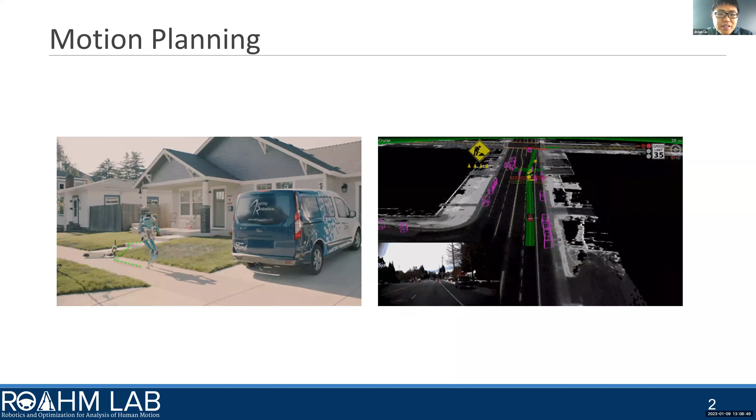To achieve these tasks, motion planning plays a really important role, whose job is basically to plan a viable path that guides the robot to a desired location. Such planned paths are better to satisfy robot dynamics. Otherwise, for example, a bipedal robot is very likely to fall if we command it to turn very quickly while it's walking with a large speed.

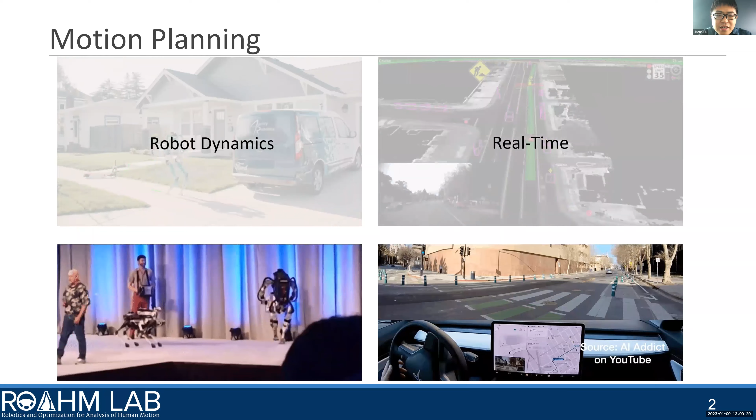Secondly, motion planning is expected to run in real time to deal with sensor measurements collected at runtime. Unfortunately, we can easily see robots crash unexpectedly in different scenarios due to imperfect sensing of the environment, so a motion planning algorithm should consider robot safety, and also we hope a motion planning algorithm can be general enough to survive in different kinds of environments.

So people have developed many fantastic algorithms for path planning, and taking all these four aspects into consideration while planning a path is still very challenging.

Because all robots have limited sensing horizon, real-time motion planning usually operates in a receding horizon fashion. Consider this toy example in which the ego vehicle in black is tasked to autonomously navigate itself to the right without hitting any obstacles shown in white. With receding horizon planning, the ego vehicle will first sense the world, find a path, and have it executed. The same procedure repeats with new sensor measurements.

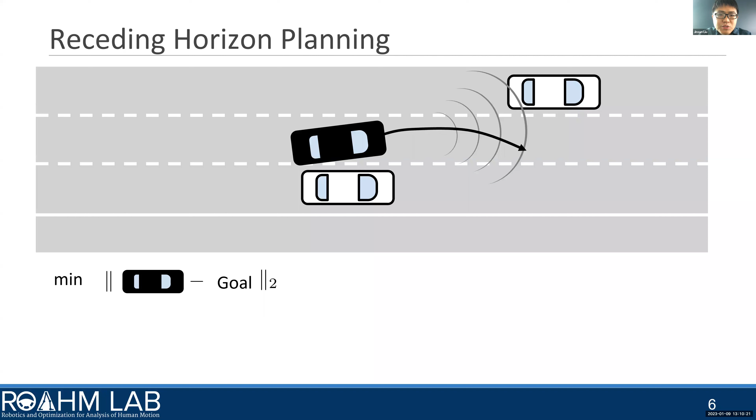Each planning iteration can be naturally written down as an optimization in which we try to minimize some cost, for example, here, the distance to our goal, and subject to robot dynamics as well as safety at all time.

Let's see where these four motion planning features appear in this setting. Environment is considered with sensor measurements collected at runtime. Robot dynamics and safety are enforced in constraints. And of course, for real-time performance, we just need to solve this optimization fast.

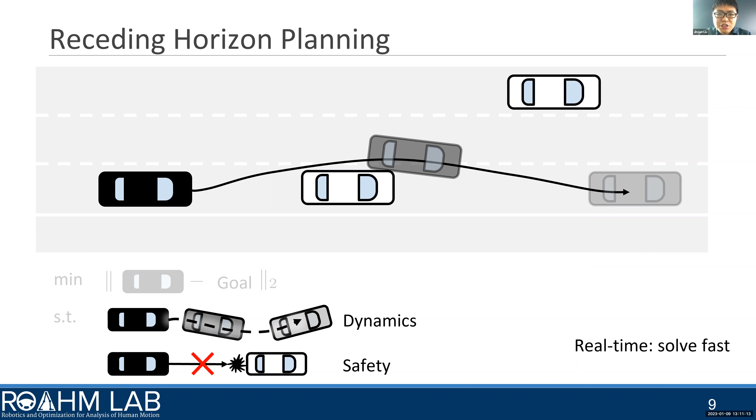Unfortunately, because robot dynamics are typically nonlinear, closed-form solutions of robot trajectories are usually not computable. Therefore, approximation can be utilized. In a naive implementation of receding horizon planning, because finer discretization of robot dynamics in time gives a better chance to provide robot safety, evaluation of these constraints can be potentially expensive, resulting in a trade-off between robot safety and real-time performance.

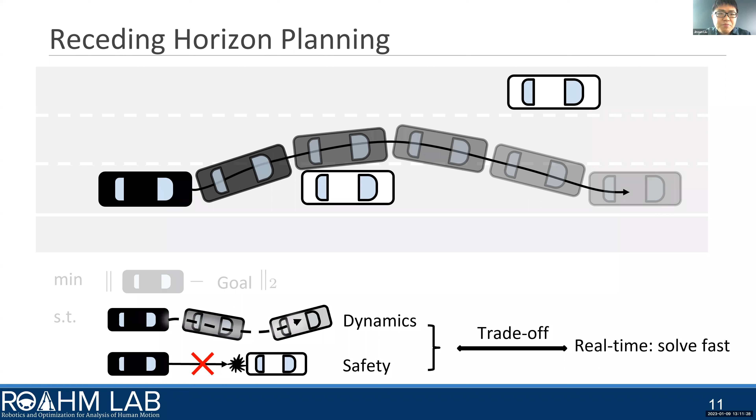To circumvent this unexpected trade-off, reachability-based trajectory design, or RTD, proposed by the alumni of ROAHM Lab, tackles this problem with 3 steps.

First, RTD will parameterize the control input of the system to avoid optimizing the whole control input sequence during online planning. Then RTD analyzes the reachability of the robot behavior completely offline using a forward reachable set, which collects all possible behavior of the robot starting from the considered initial condition space and control parameter space.

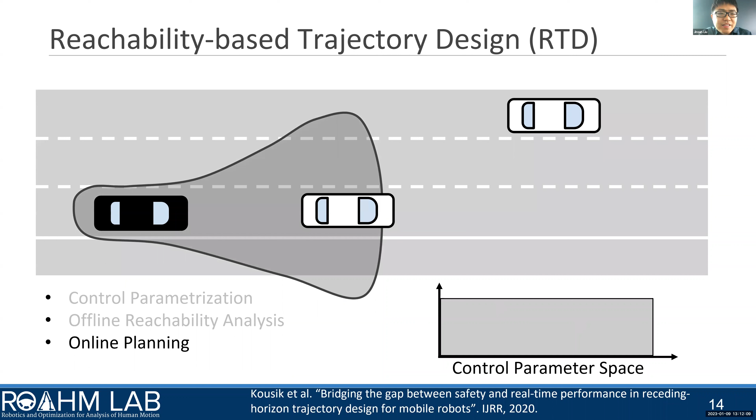Then during online planning, because robot behavior has already been computed offline, RTD directly uses the pre-computed reachable set to avoid obstacles while maintaining real-time performance, and the same procedure repeats.

In summary, RTD deals with robot dynamics by offline over-approximating the robot behavior using a forward reachable set. It provides robot safety in a continuous time interval. It runs in real time, and it treats the environment deterministically, which means it assumes perfect knowledge of obstacle locations.

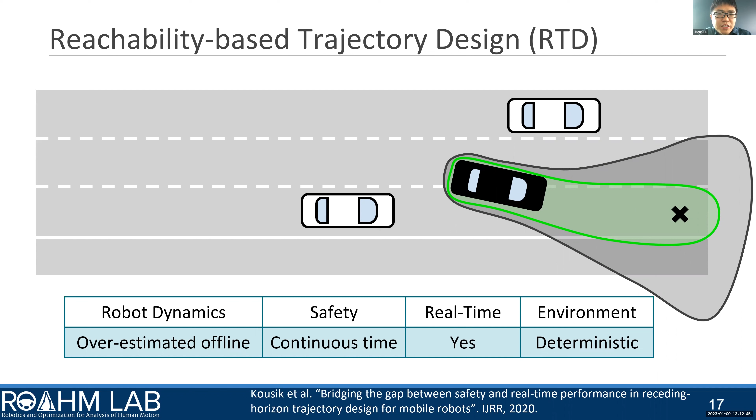RTD is a very general framework, and my colleagues have applied it on multiple platforms, including electrical vehicles, drones, and manipulators. Compared to these non-hybrid platforms whose dimensions are roughly 6, I have successfully generalized RTD to walking robots, including Cassie and Digit, which are more challenging in general because their dynamics are hybrid and their system dimensions are at least 20.

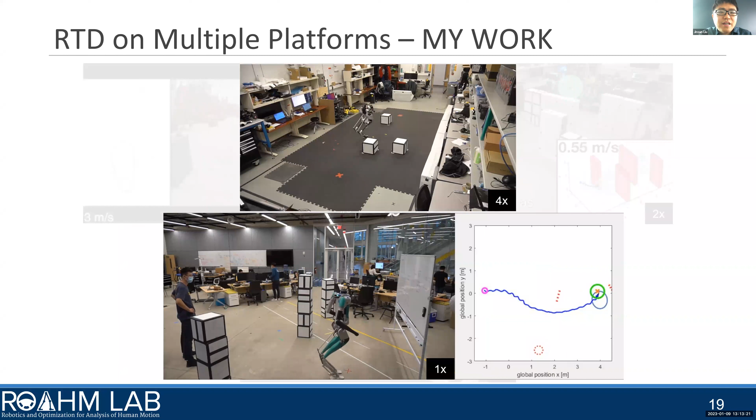However, as I worked with RTD, I could clearly feel that RTD suffers from several issues. Number one, RTD uses a simplified model to approximate the full order model, with the error between the two models being bounded. Therefore, the offline computed reachable set could be conservative. In addition, generating such error bounding functions requires aggressive sampling of the robot behavior, which is not quite elegant for a method that claims it provides a safety guarantee.

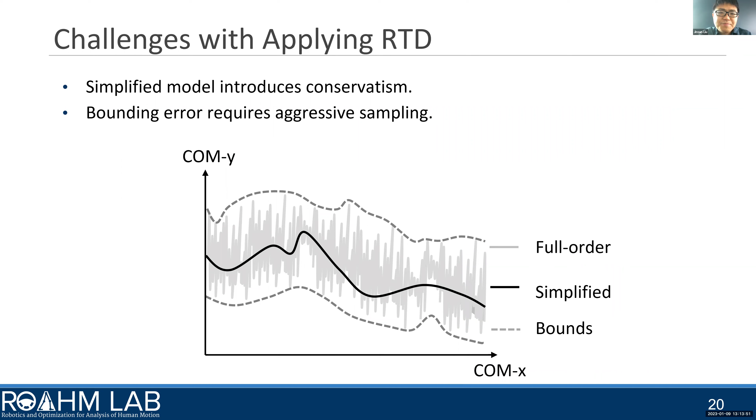Furthermore, this conservatism becomes even worse when the environment is uncertain, because in this scenario, RTD will require the robot to avoid a much larger unsafe area, which may result in online planning being infeasible and a large decline in the performance of the robot.

My thesis focused on illustrating the generality of RTD on walking robots and addressing the issue I just mentioned. In particular, we achieve tighter reachable set computation without using a simplified model, and we balance conservatism and safety in uncertain environments using differentiable chance constraints.

In this talk, I will focus on the last two items in autonomous driving scenarios, and the generalization of RTD on walking robots is described in my thesis document.

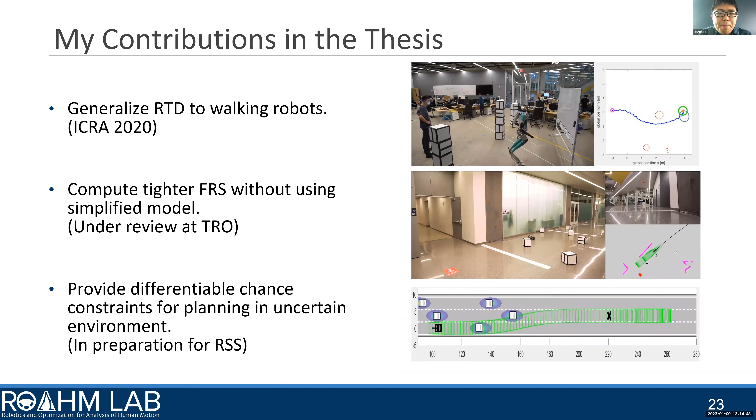Apart from the material I covered today, I've also worked on other projects, including SLAM, robust environmental mapping, and observer design for nonlinear systems.

In the first part of this presentation, we're going to assume the environment is deterministic, meaning obstacle locations are known conservatively at runtime. I'll now briefly go through some state-of-the-art motion planning approaches under this assumption.

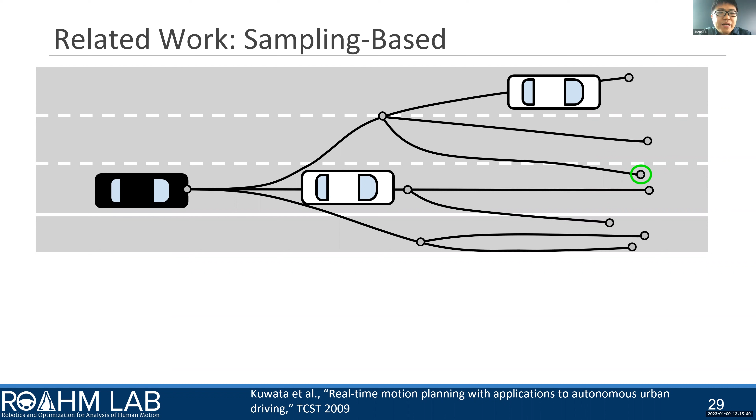To find a collision-free path, the sampling-based method approximates robot behavior by discretizing the state space and control space and numerically integrating the robot dynamics during online planning. Safety of the robot is checked at discrete time instances. Therefore, real-time performance of this method really depends on the fineness of discretization in both time and state space.

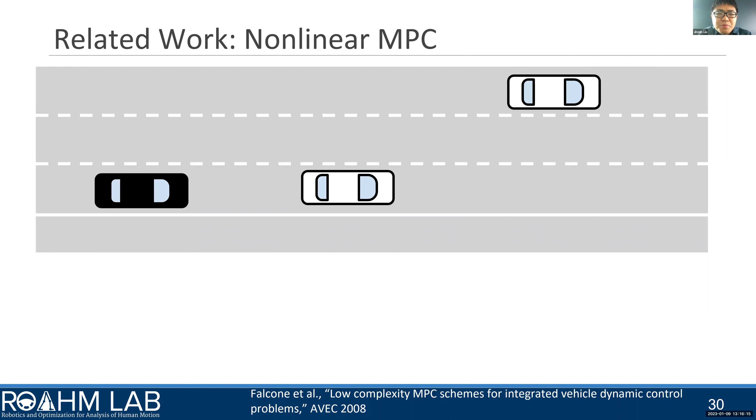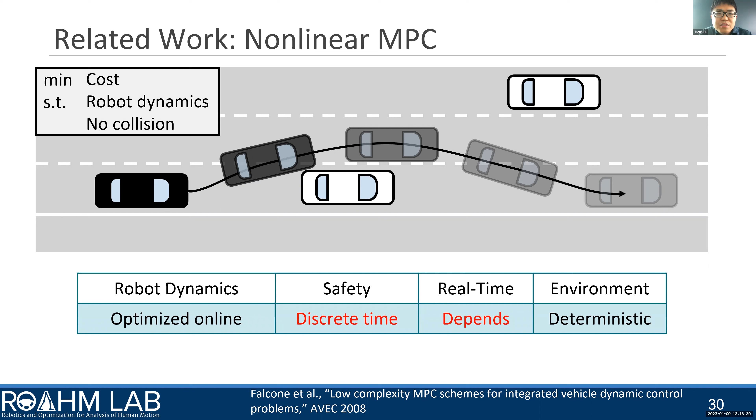The nonlinear model predictive control method plans a collision-free trajectory by solving a nonlinear optimization with discretized robot dynamics and safety conditions enforced at discrete time instances. Because discretization is also in use, nonlinear MPC methods also suffer from the same trade-off between time discretization and real-time performance.

To address this challenge, reachability-based approaches pre-compute a forward reachable set in the form of, for example, zonotopes, which is a special form of polytope that I'll formally define in a minute.

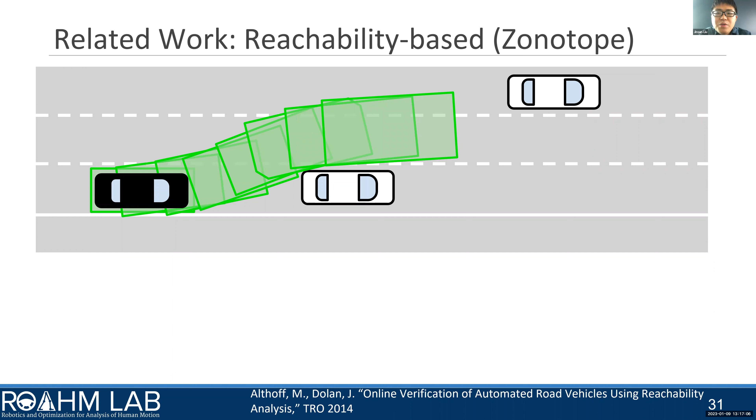To offline compute a tight reachable set over a continuous time interval, such methods linearize the robot dynamics into a linear time-variant system, with the linearization error being conservatively bounded. This method checks robot safety during continuous time intervals.

However, because the control space is discrete, zonotope reachability-based methods require a zonotope library for each maneuver, and therefore result in very large memory consumption.

The approach I describe here is called Refine, which is an extension of the traditional RTD framework using robust feedback linearization and zonotopes. In particular, we realized that to generate a tighter reachable set, it is important to take controller design into consideration as well.

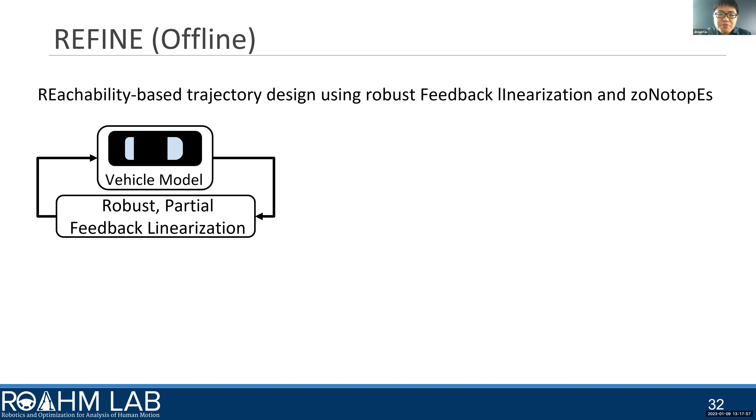Therefore, in this work, we first design a robust partial feedback linearization controller to track parameterized reference trajectories. With the closed-loop full order dynamics, we next offline compute the forward reachable set of the robot using zonotopes.

Then during online planning, depending on the value of the control parameter we choose, the pre-computed zonotope reachable set can be narrowed down to much tighter zonotopes for real-time obstacle avoidance.

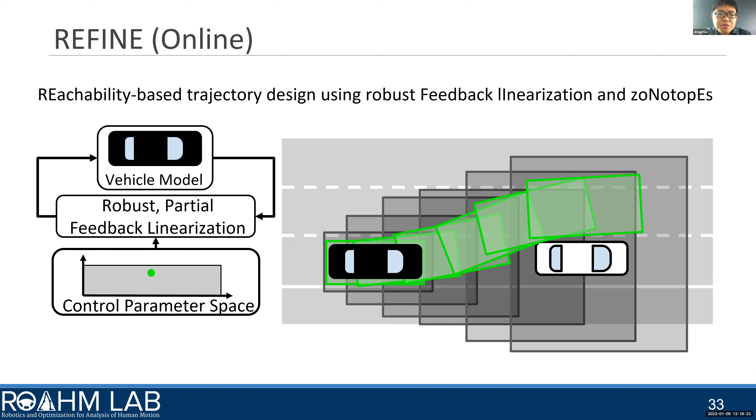Here is a quick review of what I've described. Compared to the method I just mentioned, Refine approximates the FRS offline with continuous control space and provides safety checks during continuous time intervals.

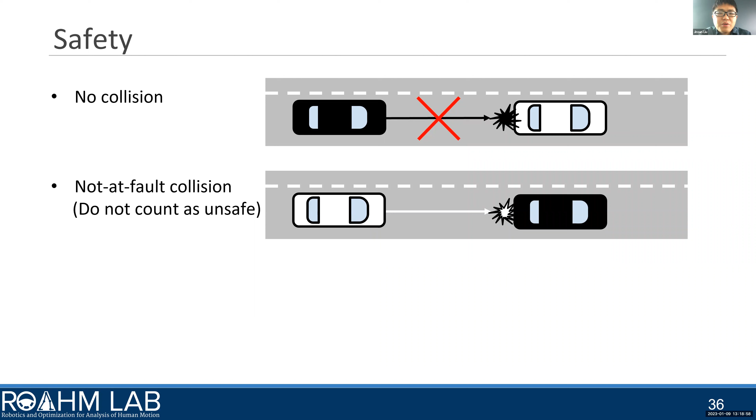In this work, we consider safety in three folds. First, we do not run into other vehicles intentionally. However, in the case when we are stopped and some other vehicle runs into us, we do not consider that as our fault. And finally, we ensure the existence of a fail-safe maneuver so that when online planning becomes infeasible, we can always apply this fail-safe maneuver to stop and protect ourselves.

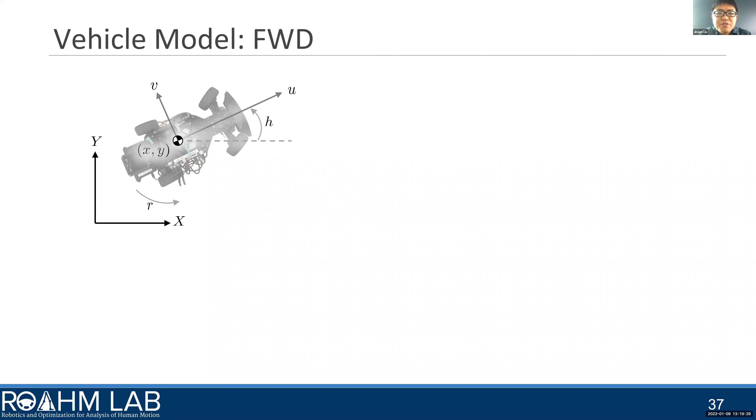In this work, we consider a front-wheel drive vehicle model with 6 states, where X, Y, H give the position and heading of the vehicle, and U, V, R give the longitudinal speed, lateral speed, and yaw rate. The dynamics are shown on the right, where items colored in yellow are vehicle parameters, including mass, moment of inertia, and vehicle length. Notice the steering angle and wheel speed are the actual control inputs to the vehicle.

But in this presentation, I'm going to treat tire forces as our control inputs and observed signals for simplicity. The transformations between tire forces, steering angle, and wheel speed are detailed in my thesis document.

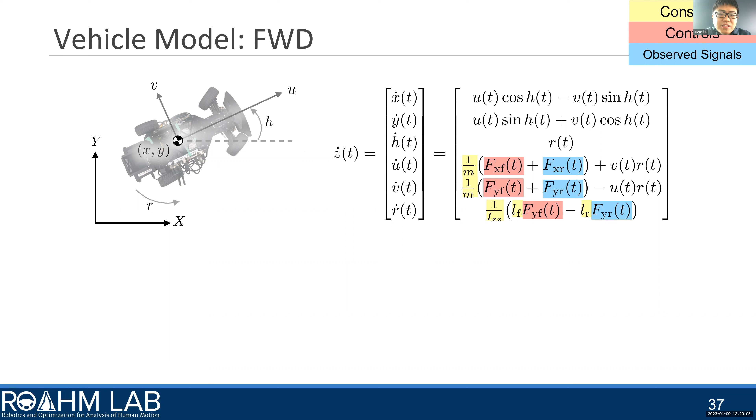I'd like to point out that tire forces are indeed nonlinear functions of vehicle states that are constructed in a data-driven fashion in general. This control and planning framework I present today can account for modeling errors that are unknown and arise from, for example, imperfect system identification or state estimation.

We can also generalize to rear-wheel drive and all-wheel drive vehicle models. However, due to time limit, I'm going to assume we have a perfect vehicle model today.

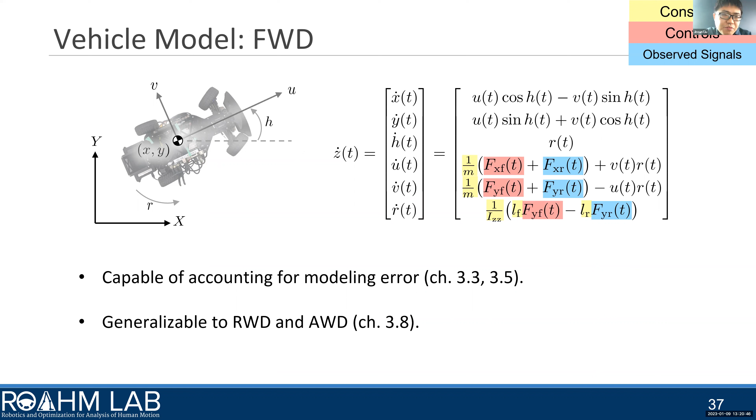Similar to RTD, we also parameterize our controller using a 2D vector P that indicates desired speed and lateral displacement. In particular, we define our control parameter among 3 families of daily applied maneuvers, including speed change, direction change, and lane change.

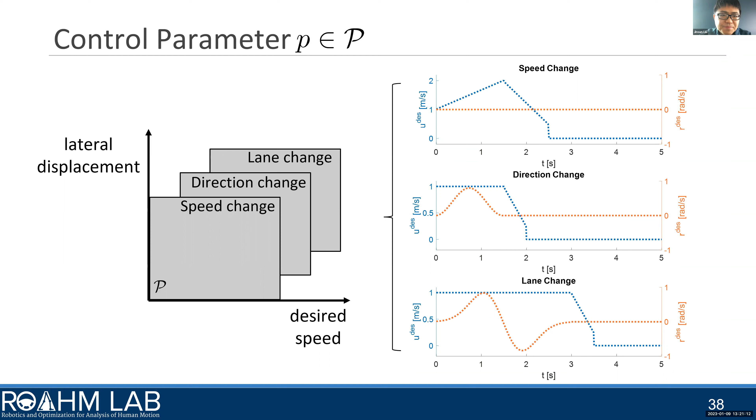Now, compared to the original dynamics, nonlinearities in the dynamics of U and R disappear in the case when there's no modeling error. And in fact, when there is modeling error, we are able to introduce a robust term in the controller so that the modeling error can be penalized at its worst case. And we have the theorem saying, given vehicle initial condition and control parameter, the vehicle is guaranteed to be stoppable within a bounded period of time, and we can prove the tracking error on U is bounded. And the theorem also holds when we have non-zero modeling error.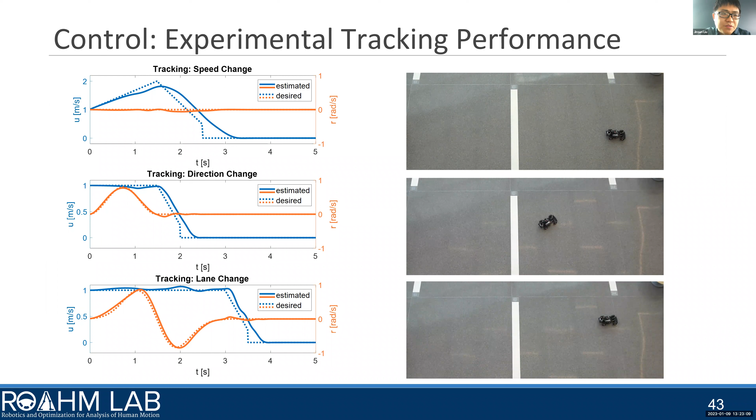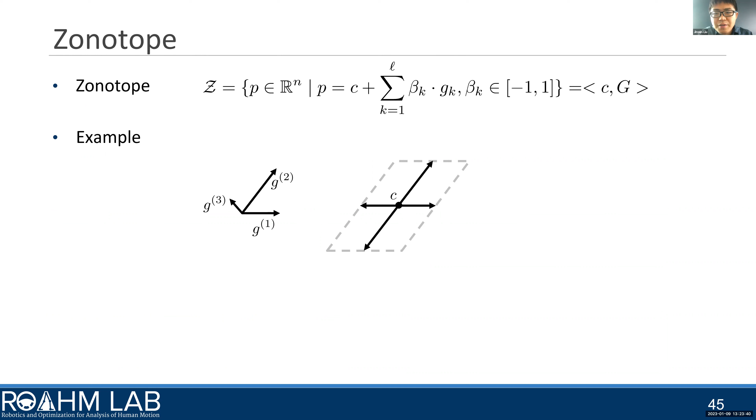Next, I'm going to define zonotope and offline reachability analysis. A zonotope is a special polytope defined by the center C and generator G. For example, here in this 2D space, we're given 3 generators and a center C. Then the first generator makes our center into a line segment, and the second generator makes the line segment into a parallelogram, and the third generator makes the polygon into a hexagon.

Zonotope is nice because summation and matrix multiplication are computationally tractable. Therefore, zonotope behaves well in linear systems reachable set computation. Recall our closed loop dynamics of U and R are linear when there's no modeling error. So that's the reason why we choose zonotope as the mathematical tool that we use for reachability analysis.

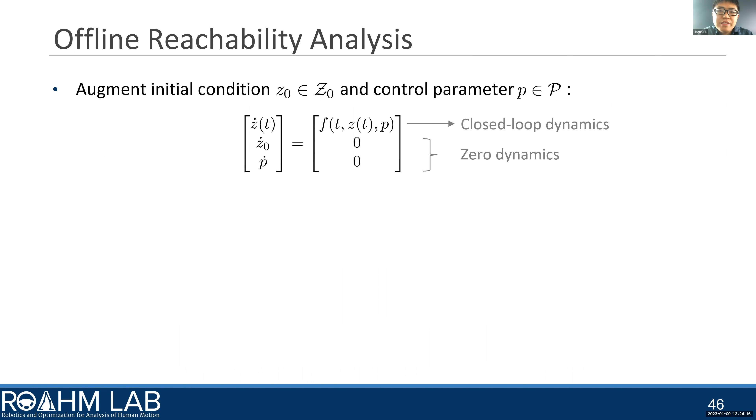During offline reachability analysis, we first augment initial condition and control parameter in vehicle states and give them zero dynamics. We do this because this allows us to hold the information of initial condition and control parameter all the time during the computation of reachable sets. And then after we evenly partition the planning horizon into pieces, we can compute the reachable set from initial condition space, which is Z0 times Z0 times P.

Such zonotope reachable set can be solved using an open source toolbox called CORA, where R sub j indicates the zonotope reachable sets during the j's time interval. Notice this zonotope reachable set over-approximates the vehicle behavior with all elements in the control parameter space P.

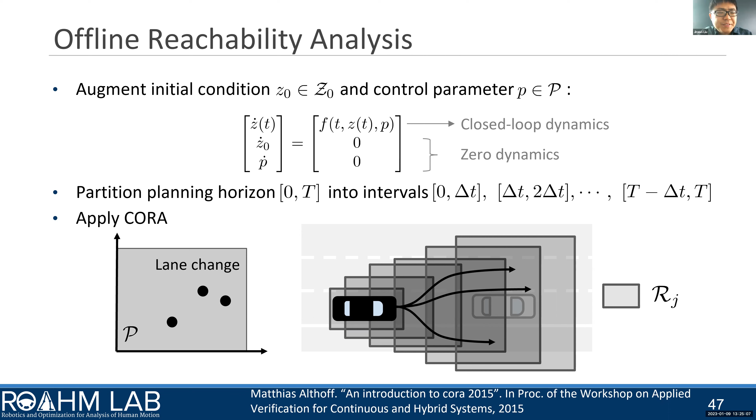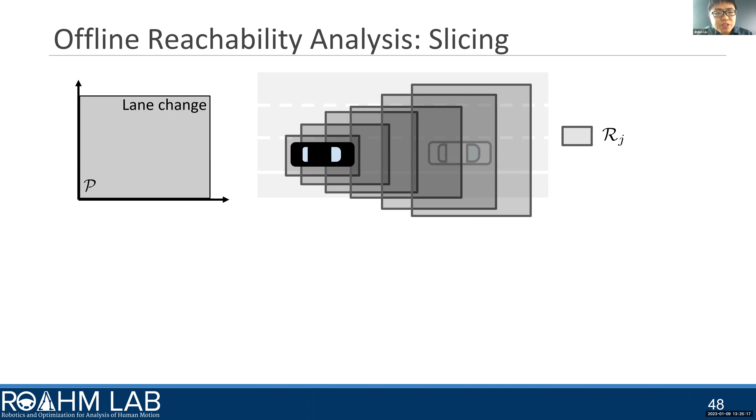This zonotope reachable set shares a very nice property. Remember, we have encoded the information of initial condition and control parameter in our state. Therefore, we can generate a slice of the zonotope reachable set based on our initial condition and control parameter. And we have the theorem saying the sliced zonotope over-approximates the robot behavior during the j's time interval.

Notice the slice operator is linear with respect to Z0 and P. And I would like to emphasize that during the whole procedure of offline reachability analysis, no simplified model is involved. Therefore, we have avoided a major downside of RTD.

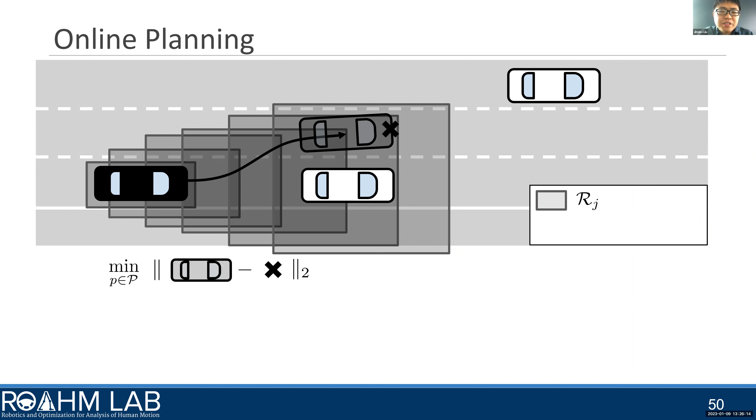Then I'll formulate our online planning. During online planning, given the tracking waypoint, we plan a path by solving an optimization problem in which we minimize the Euclidean distance between the waypoint and the predicted vehicle position. Sliced zonotopes are used to ensure collision-free against other obstacles. And we have the theorem saying any feasible solution of the optimization guarantees vehicle safety.

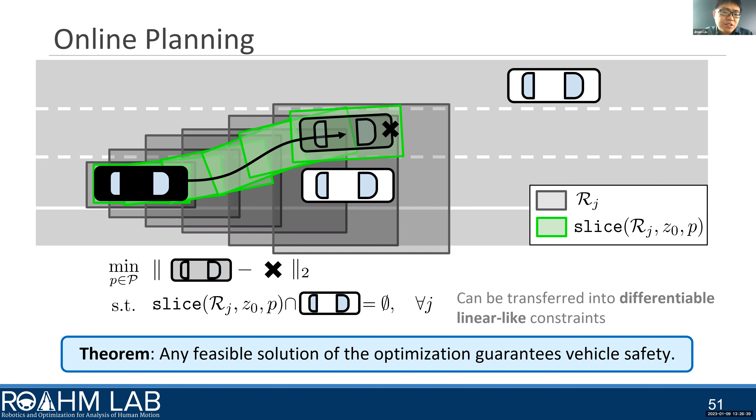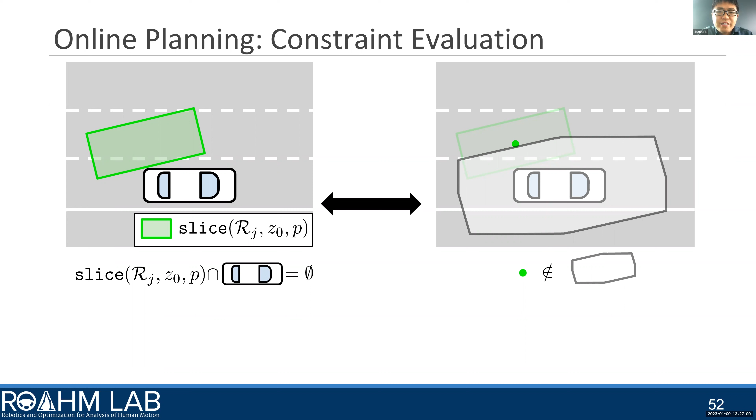Note, this constraint appears as set intersection, but in fact, we can transfer this constraint into differentiable linear-like constraints that we can implement easily. In particular, we first transfer the collision-free condition into a point-exclusive condition, which says the center of the sliced zonotope should not appear inside the vehicle's footprint buffered by the size of the sliced zonotope. This condition is equivalent to this exclusive relation.

Notice the left-hand side of this relation is a linear function of P, and this is because the sliced operator makes the center of the sliced zonotope, the green dot, really linearly dependent on P. The right-hand side of this relation is the half-space representation of the polytope. This condition can be further simplified into the following inequality, which is the actual constraint that we implement for online planning.

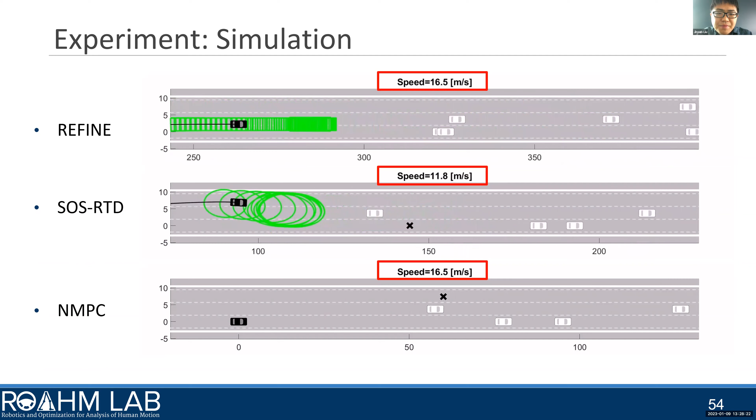This implies the polynomial reachable set is actually more conservative than our zonotope reachable set. Also, RTD stops in the end because its online planning becomes infeasible. Let's have REFINE keep running aside and see how NMPC works.

It can be seen that without reachability analysis, NMPC is able to drive the ego vehicle more aggressively with much higher speed. However, because NMPC imposes vehicle safety at discrete time instances, the ego vehicle ends up with a crash, even though NMPC thinks no safety conditions are violated.

We have generated more than 1,000 scenarios, and REFINE is able to navigate through the traffic successfully 83% of the time, with no crashes. RTD also has zero crashes, and its solving time is much faster, but with a lower success rate due to the conservatism of the polynomial reachable set.

Also, it needs more memory to save those polynomial reachable sets compared to REFINE. The NMPC method crashes 29% of all trials, but results in the fastest traveling speed.

However, NMPC is unable to provide any real-time performance because the planning horizon is much smaller than the solving time. We have also compared REFINE against a baseline method proposed by the group that implemented CORA.

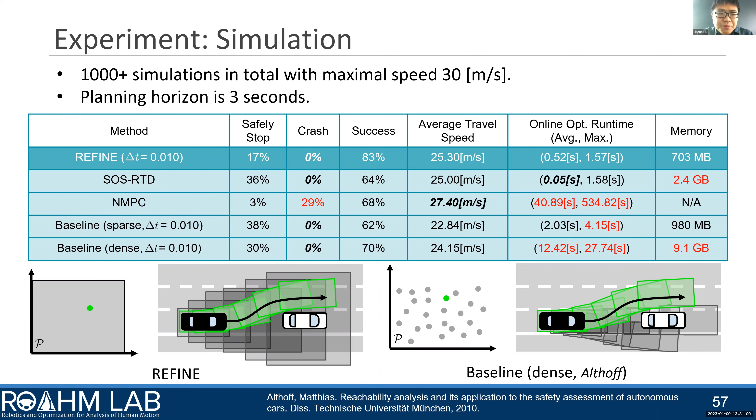On hardware, we implement the proposed method on a 1/10 scale race car robot called Rover. During this test, we asked the Rover to run three loops on the first floor of the robotics building.

While the Rover is running, we throw boxes in front of it just to see how robust REFINE is. We have attached a GoPro on the Rover so we can observe the experience from the first-person point of view.

On the bottom right, we provide a visualization of how REFINE plans, in which the Rover is shown in black, reachable sets are shown in green, static obstacles of the building like chairs and walls are colored magenta, and the boxes we throw are shown in white.

During this experiment, we did not throw any obstacles during the first loop, to see if the Rover can at least finish the loop with the provided maneuvers, including speed change, lane change, and direction change maneuvers.

Starting from the second loop, we began to throw boxes in front of the Rover to see if it can sense obstacles and plan a path to avoid them in real time.

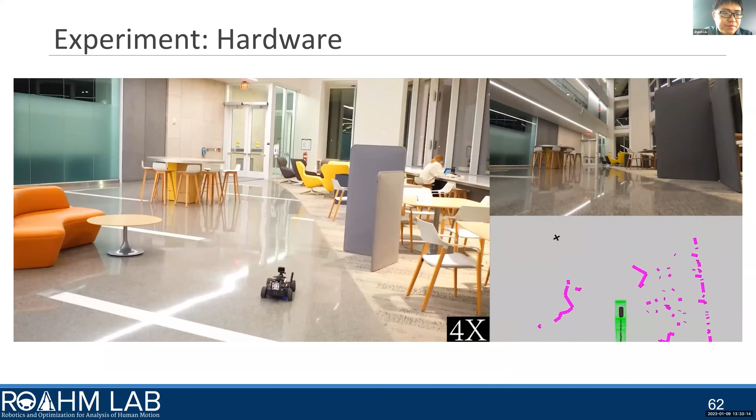And in the third loop, we keep throwing boxes in front of the vehicle or in front of the robot. And the experiments show that Refine is robust enough to handle the task.

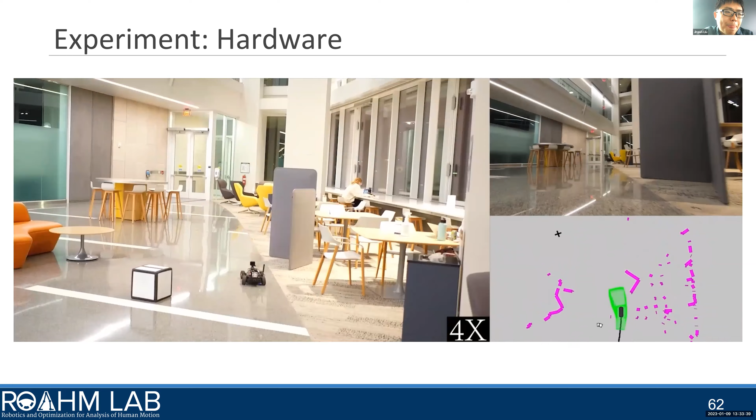Oh, something is wrong. Oh.

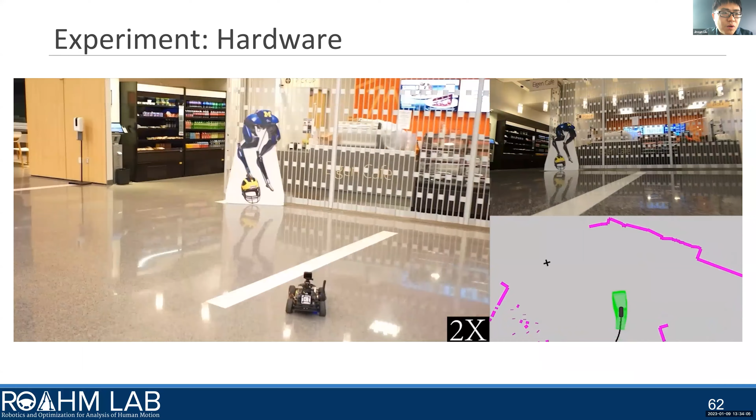And then finally, we stop the experiments by building a wall at the end of the third loop, to see if the rover can just stop itself when there's no path, no safe paths.

And during the whole experiment, no collision happens. Next, I'm going to talk about real-time chance constraint motion planning in uncertain environments.

I'm going to first talk about why this chance constraint can be helpful, and then I'll go through related work, explain chance constraint safety and online planning, and then I'll give a detailed mathematical explanation of how we evaluate chance constraint, and then I'll provide some experiments.

So in the uncertain world, we no longer assume perfect estimation and prediction on locations of obstacles due to, for example, sensor noise and the lack of information on vehicle motions. Therefore, collision can be described in a probabilistic fashion.

In this work, the risk of collision is defined as the probability that the ego vehicle intersects with the moving vehicle. Then during the trajectory planning online, we can search for a plan that doesn't exceed the maximum risk of collision that we want to take by enforcing a chance constraint.

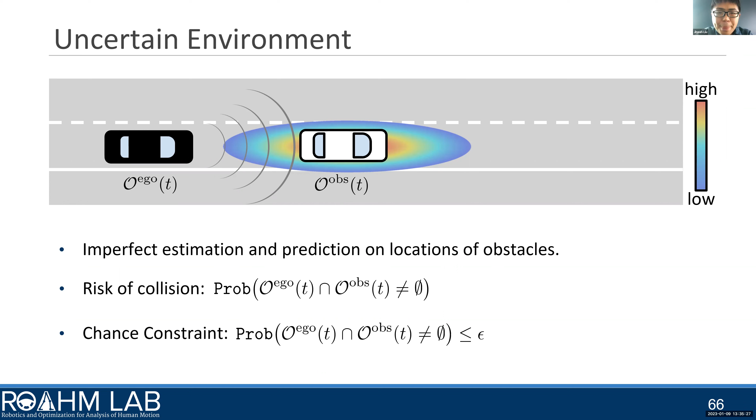Now the question is why chance constraint is helpful. Recall a deterministic approach may require the ego vehicle to avoid a much larger unsafe area, which could result in online planning becoming infeasible easily and a large decline in performance.

With the chance constraints, because we are willing to take some risk, we may find a feasible solution easier without violating the risk we want to take.

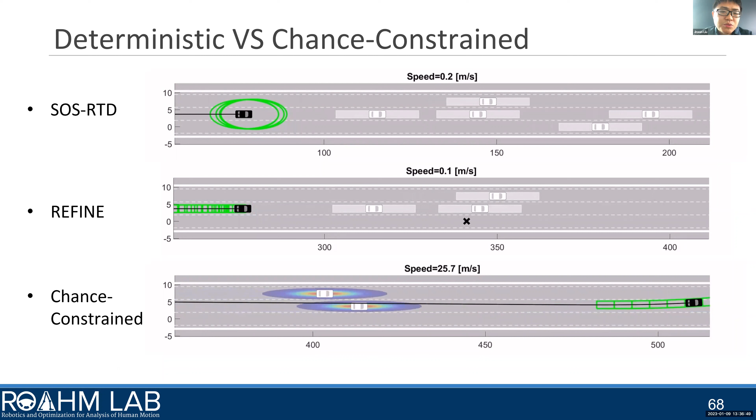So now we know chance constraint could be helpful for motion planning in uncertain environments, but the annoying thing is computing this risk of collision in closed form is actually very difficult.

And this is because in real applications, probabilistic estimation of obstacles can be arbitrary. So now I'm going to go over some methods to approximate the probability of risk in the literature.

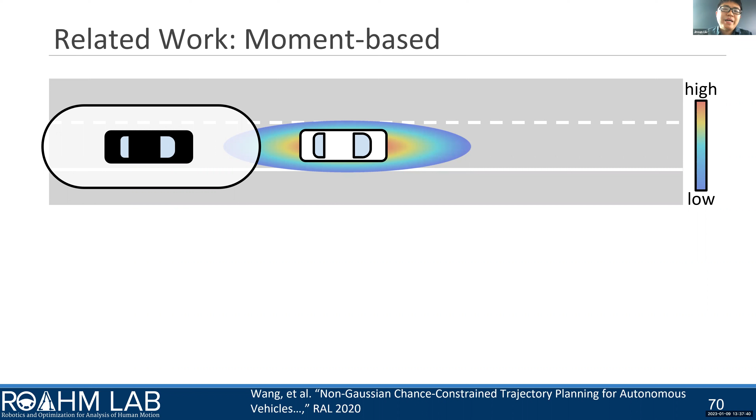To strictly over-approximate the risk of collision so that the chance constraint can be sufficiently enforced, one can create a so-called collision ellipsoid, generated by buffering the ego vehicle's footprint by the obstacle's footprint, shown as this white region. Then the collision risk can be computed as the probability of the obstacle center intersecting with the collision ellipsoid.

Such probability is then overestimated using a moment-based inequality, for example Cantelli's inequality, that only uses the mean and covariance of the probability distribution.

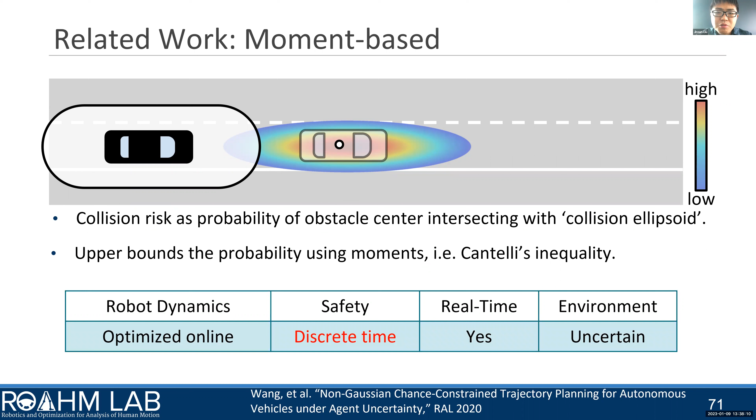Moment-based methods optimize robot trajectory online and can provide safety at discrete time instances. However, this relaxation of the risk using moment-based inequality can in general be conservative, because this inequality has to hold for all possible probability distributions that share the same probability moments.

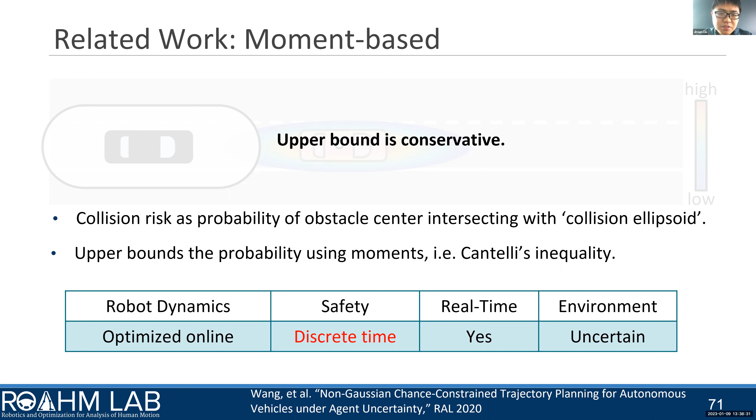My colleague Sean Vaskov has proposed a risk-aware motion planning framework called CCPBA with the help of polynomial reachable sets. In CCPBA, risk of collision is bounded from above and below in real time using branch and bound, with the assumption that we have perfect knowledge of the cumulative density function in closed form.

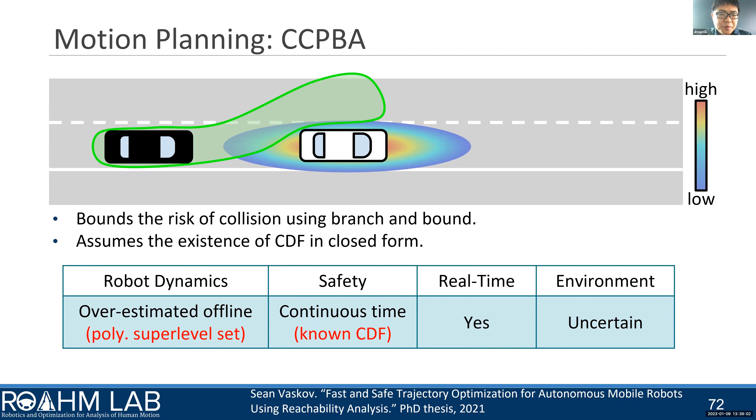CCPBA provides robot safety in continuous time. However, the problems of CCPBA are, first, CCPBA suffers from conservatism in using polynomial reachable sets, and the assumption of a closed-form cumulative density function may be violated in real applications.

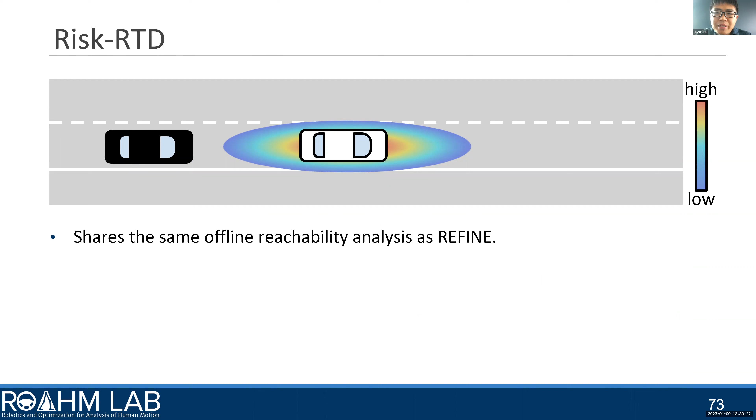The framework I present here is called Risk-RTD, which shares the same offline reachability analysis as REFINE and plans online by solving an optimization with a chance constraint that is sufficiently enforced in a tighter and computationally effective way.

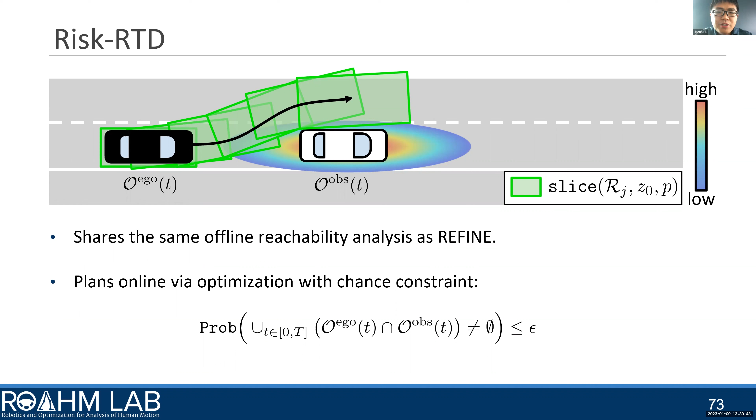In particular, we're going to use this chance constraint, which says the probability of a collision during the entire planning horizon is bounded by some threshold epsilon.

Here is a quick review of what I described. Compared to these two methods, Risk-RTD utilizes zonotope reachable sets and provides robust safety in continuous time intervals without assuming perfect knowledge of the cumulative density function.

Under the setting of an uncertain environment, we need to modify our definition of vehicle safety. Compared to the vehicle safety we used previously, in this work we define chance constraint vehicle safety by bounding the probability of collision from above with some value epsilon as the risk threshold.

Because of limited time, I'm going to skip the part on how we decide the risk threshold. However, a discussion on how we choose the value of epsilon based on real driving data published by the National Highway Traffic Safety Administration can be found in my thesis document.

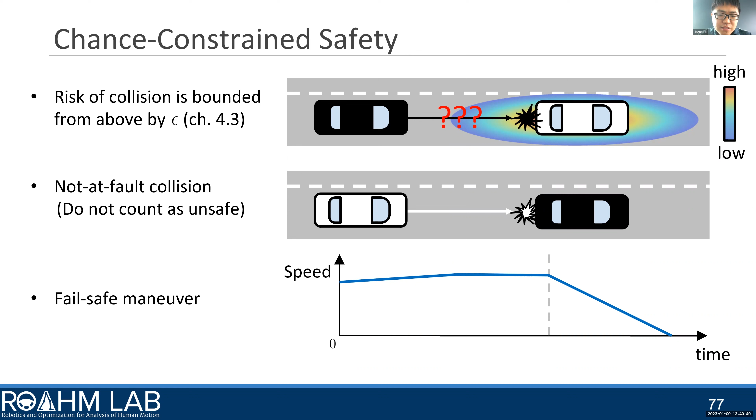Online planning can be formulated by enforcing the probability of a collision during the entire planning horizon being bounded by epsilon. For notational simplicity, I'm going to denote T sub j as the j'th time interval that we generated by partitioning the planning horizon.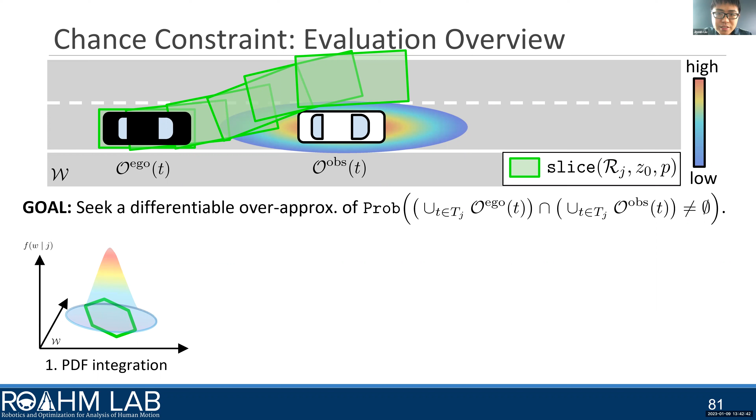To do this, I will first relax the collision risk as an integration of probability density, then relax the domain and integrand of this integration, and finally compute the relaxation of the integration in closed form.

To start, can I ask a quick question? Yes. Just to break the silence.

Can you give us a high-level intuition on why you need differentiability? What is the benefit of differentiability here?

The answer is that later during online planning, we're going to solve this online optimization with the chance constraint being enforced. To speed up the solving procedure of this optimization, providing a gradient, or providing the differential information of the chance constraint, can be helpful.

Will you explain how you utilize this differentiability later on? Because it will provide the gradient of the chance constraint, and then the optimization solver will just use the gradient to speed up the solving procedure so that we can achieve real-time performance. Okay.

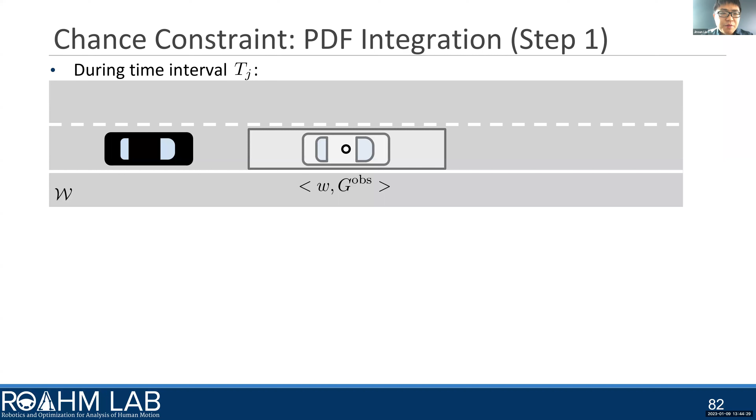To start, because our zonotope reachable sets outer-approximate the vehicle behavior over all time intervals, we assume we are able to estimate the location of obstacles over time intervals. In particular, we assume the region that the other vehicle can appear during the j'th time interval can be enclosed as a zonotope with center W and generator G obs, where W follows a probability distribution with density F of W given J.

Here we assume F is a twice differentiable function, and notice this is the only assumption I'm going to make on the probability observation of the obstacle. So this work doesn't really depend on any specific type of probability distribution.

We can then prove a theorem saying the probability of collision during the j'th time interval can be bounded by the integration of this PDF over our reachable set and this swept volume.

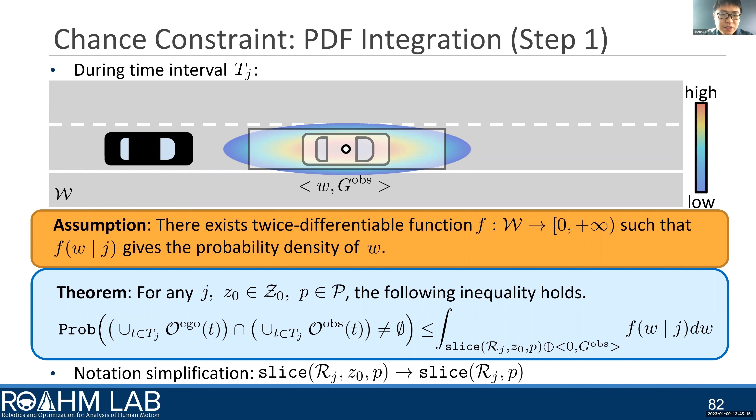For notational simplicity, from now on I'll suppress the dependency of the slice operation on the initial condition Z0. Recall that the slice operator is a linear operator. Therefore, one can represent the integration domain as a linear function of P, with this small zonotope R sub J bar and some matrix M.

Then we can rewrite the PDF integration as the equality shown here.

Next, we are going to relax the domain of integration. We are going to cover R sub J bar by a collection of right triangles that each have non-trivial intersection with the zonotope, and we have the original integration of the PDF being bounded by the summation of the integrations over all triangles. So now we only need to consider the integration over each triangle.

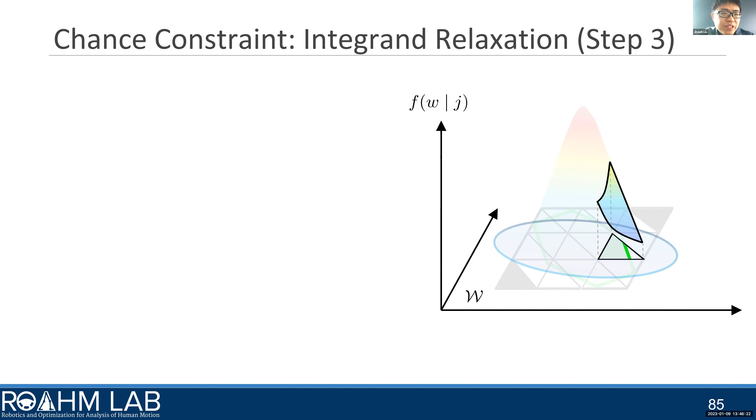In the third step, I'm going to relax our integrand. Because we have assumed F is twice differentiable, we start by rewriting F as its second order Taylor expansion and apply the mean value theorem to get rid of higher order terms.

Here, W0 is the vertex of the right angle in our triangle, and W star is some point on the line defined by W0 and W such that equality holds. Notice the mean value theorem only tells us the existence of W star, but not its exact position.

Therefore, to remove this uncertainty, we instead evaluate the Hessian over the entire triangle rather than a single point, using interval arithmetic.

Recall that our goal is to maintain differentiability, but interval arithmetic makes this intractable, simply because the evaluation domain of interval arithmetic actually depends on our control parameter P.

Therefore, to maintain differentiability, we have to further relax the Hessian by evaluating it over the entire region that a small triangle can sweep according to the domain of the control parameter. This results in an approximation that is invariant with respect to P.

With this inclusion, interval arithmetic provides a supremum and an infimum of the original density function at each point in this triangle.

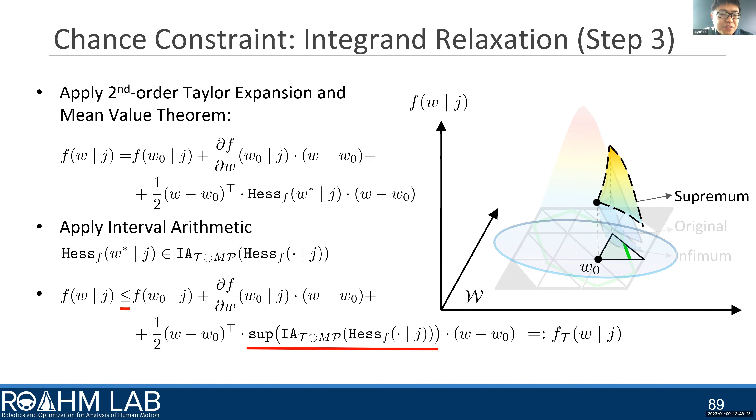Now with the relaxed integrand, notice the domain of integration, t plus mp, is just a right triangle, which is the simplest polytope made with line segments in the 2D world.

Our relaxed integrand is indeed a quadratic polynomial of W. Therefore, we can apply this lemma, which says there exists a differentiable function capital F sub t in closed form such that this integration can be evaluated exactly using the function capital F sub t.

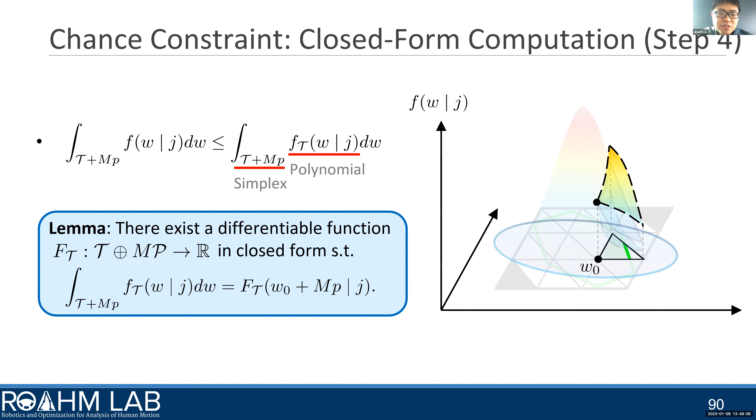So as a quick summary, we first relaxed the original risk probability as a PDF integration. We relaxed the domain and integrand conservatively. And finally, we are able to compute the relaxation in closed form.

Notice this f sub t is a differentiable function. Thus, this resulting relaxation is indeed differentiable with respect to p.

So with our relaxation, we are able to enhance the original chance constraint optimization with what we just derived. Notice this new chance constraint is differentiable, so this optimization can be solved faster.

And the evaluation of this chance constraint is naturally parallelizable, so we are able to efficiently evaluate it using CUDA.

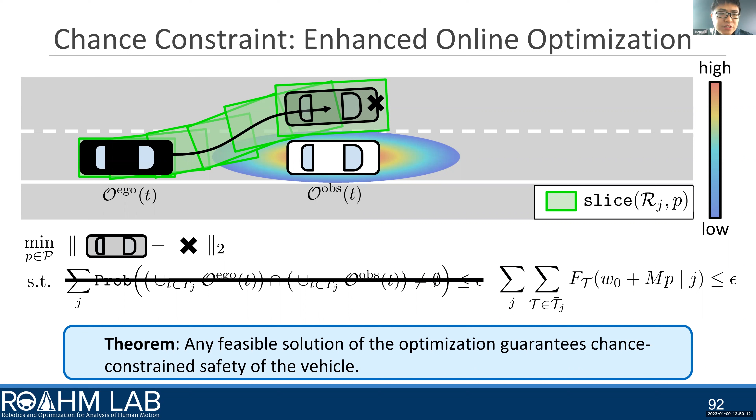And we have a theorem stating that any feasible solution of the optimization guarantees chance-constrained safety of the vehicle.

Experiments. In the first experiment, we want to test how tight our risk relaxation is compared to Monte Carlo integration, which we treat as the ground truth.

We also compared against the Cantelli inequality and the Bernstein-bound method, CCPBA. In this experiment, we generate a random Gaussian distribution and integrate it over a randomly chosen zonotope reachable set that we generated in Refine.

Over more than 3,000 scenarios, we see the proposed integration relaxation provides a much tighter over-approximation of the collision risk. And with the parallel implementation, we are able to evaluate the integration faster than CCPBA.

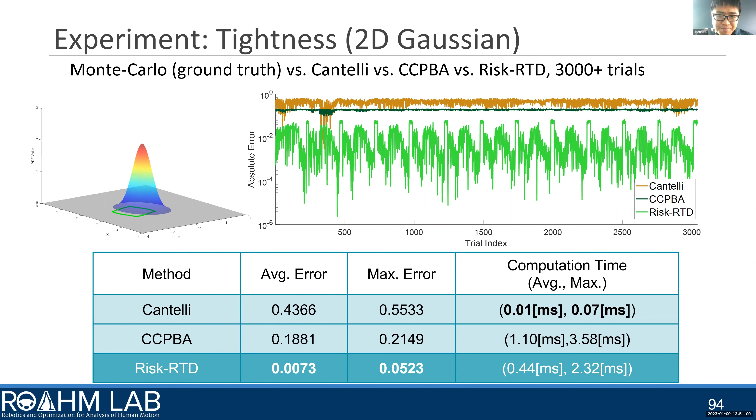To see how general our approximation is, we also test the proposed over-approximation over multiple exponential families, including 2D Gaussian, 2D beta, and 2D multimodal distributions.

Our approximations are consistently close to the result generated using Monte Carlo integration as our ground truth, across all three kinds of probability distributions.

Next, we compare our method against Cantelli and CCPBA. By Cantelli, I mean planning a trajectory in an MPC framework by solving a nonlinear optimization with the Cantelli inequality enforced. In this simulation, we ask the ego vehicle to achieve a lane change maneuver through dense traffic, but Cantelli is unable to achieve it.

In fact, Cantelli can't even find a feasible solution, so the ego vehicle just ends up maintaining its speed and runs into the vehicle ahead.

Meanwhile, CCPBA and our Risk-RTD method are both able to make the lane change safely.

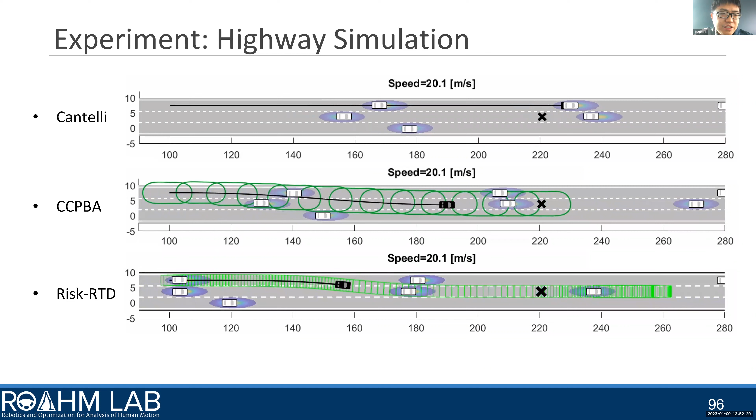Among all tests we made, Cantelli is only able to achieve the lane change about 9% of the time, but has a crash rate of 35%, due to the fact that it doesn't really have a braking maneuver when the planning is infeasible. Cantelli also achieves the highest travel speed because it doesn't use a forward reachable set to enforce the chance constraint. CCPBA solves the online optimization faster and is able to achieve the lane change at a higher rate.

Compared to these two methods, we are able to achieve the highest success rate, and we are also able to achieve real-time performance because our runtime is smaller than the planning horizon.

We also compare the three methods in randomly generated scenarios, in which they need to plan multiple iterations successively and let the ego vehicle travel for a longer distance. Among these tests, both Cantelli and CCPBA have low success rates, but we are able to survive about 70% of the trials.

Next, I'm going to vary the risk threshold and see if that makes any difference. By varying the value of epsilon, we see when epsilon equals 0.005, the ego vehicle decides to just stick in its lane because it feels like doing a lane change may be very dangerous. With epsilon equals 0.05, the ego vehicle is able to achieve half of the lane change. And with epsilon equals 0.1, the ego vehicle is able to achieve a full lane change.

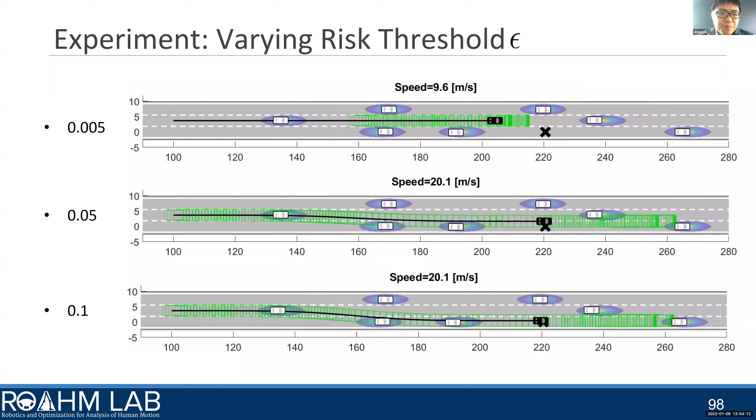Statistically, we do see as epsilon increases, Risk RTD gets easier to find a lane change maneuver. But one thing is that even when we have increased our threshold to 0.1, or equivalently 10%, our crash rate is still considerably low. That means although we have outperformed the other two methods, we are still being very conservative compared to the actual risk of collision. In fact, we are able to analyze the conservatism in our computation from several perspectives.

However, due to time limits, I'm going to skip this, and I'm happy to discuss it if people are interested.

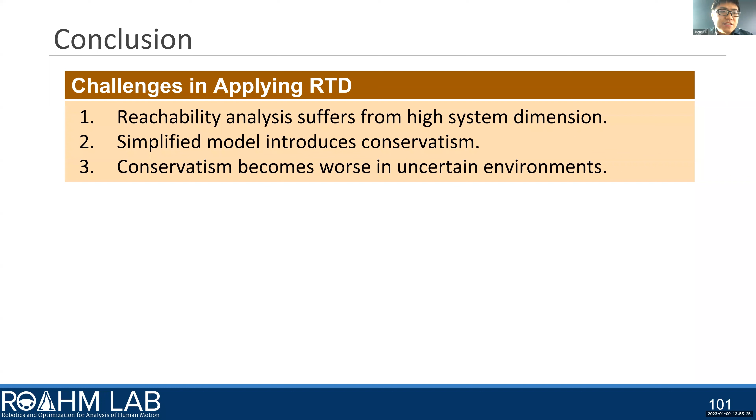As a conclusion, my thesis tackles three challenges in applying the RTD framework. First, reachability analysis suffers from high system dimension, and the usage of a simplified model introduces conservatism, and this conservatism becomes worse in uncertain environments. My contributions are: first, I'm able to generalize RTD to high-dimensional walking robots; second, I'm able to compute a tighter forward reachable set without using the simplified model; and we provide a differentiable chance constraint for planning in uncertain environments.

Here I'd like to provide some possible future directions based on my work. First, it would be good if we can achieve reachability analysis on the full order model of a walking robot. My lab mates Bohao and Iti have made some work using a robust controller in simulation, but more work needs to be done to achieve real-time planning.

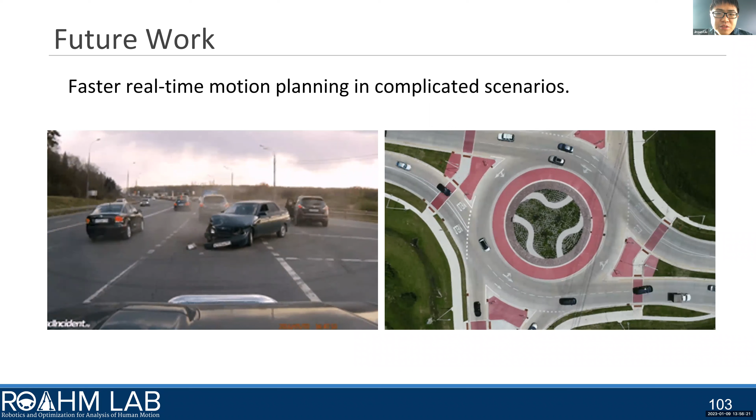Next, in more complicated scenarios like unguarded left turns and roundabouts, we need faster planning so that we can react to any observations collected at runtime.

Lastly, we hope the risk-aware framework can be generalized to other platforms. For example, a legged robot may need to navigate through environments with uncertain terrain information, or a manipulator needs to refine its belief about the mass of an object it is carrying while moving that object. My lab mates Parker, John, and Zach have made great progress on these projects, and I'm eager to see this work continue.

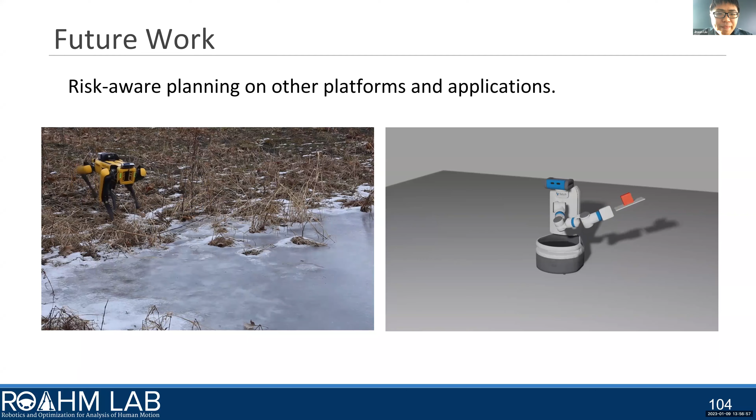In the end, I'd like to thank my committee members. Ram, I've said many times that you are my life changer, and I really mean it. I can't be more thankful for all you have done for me. Professor Grizzle, this whole thesis starts from the questions you asked me during my qualification exam. Professor Ozay, you are the first one who taught me optimization, hybrid systems, and zonotopes, and all these math tools are used in this thesis. And lastly, Professor Skinner, thank you for your kindness, advice, and detailed suggestions to make this work more complete.

I'd also like to thank my collaborators on all the works presented today: Shalon, Simon, Lucas, Lena, Vishwas, Lucas, Lena, and Hansen. It's been a pleasure to work with fantastic people like you. I'd also like to thank all my closest friends in Ann Arbor: Pengcheng, Junming, Fan, Jiaxin, Aibo, Lu, Yukai, Ray, Bowen, Shannon, and Zhe. I can't imagine how I could have survived without you guys these past several years. I would also like to thank all members of ROAHM and FCAV, and of course Talia. It's been very lucky to join this lab, and I enjoy every second I spend with you guys. This journey has been very tough, but fortunately I got to work and hang out with people I really like. And finally, I'd like to thank my parents for their endless support and love. I haven't seen you guys in years, and I really miss you.